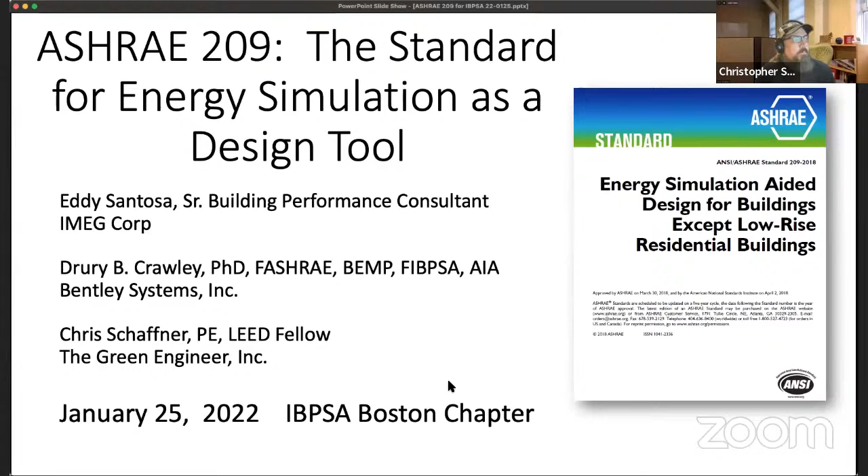So that's tremendous. What we're going to talk tonight is about ASHRAE 209. For those of you who are not familiar with it, we'll get an overview of that. And for those of you who are familiar with it, we're going to give you a chance to give us some input and some feedback. As was mentioned, all three of us are members of the ASHRAE 209 committee, and there's an active effort going on to potentially update that standard, and we're looking for input from users to help us understand how we can make a better adoption.

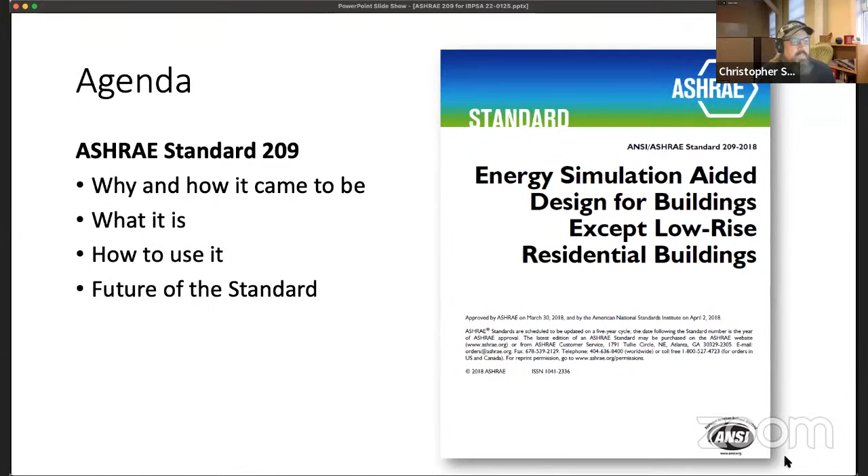So we're going to start with what is it, and specifically why it exists, and then what is it, and then I'll go through some of the details of the different cycles of modeling, and then we'll talk a bit about the future of the standard. So with that, I'm going to hand over to Eddy, and he's going to walk us through the first section here on the standard itself.

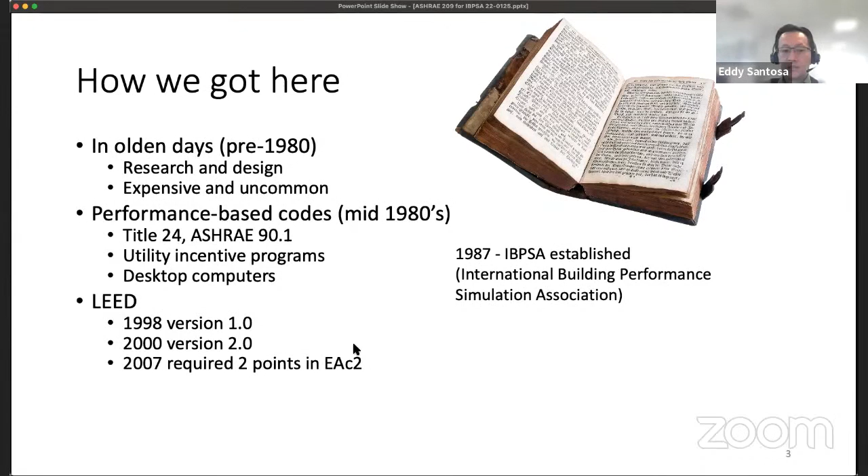In 1987, IBPSA was established to help enhance building performance in the market. I think energy modeling became very popular starting with the adoption of LEED, especially around 2007 to 2010 - it became very popular. I started my career around that era. I still remember in 2007, I was in a job interview, and I put in my resume that I have energy modeling skill, and architects still asked, is it like 3D Max? So apparently, although it became popular, it was not very commonly understood. But hopefully now everybody knows what energy modeling is.

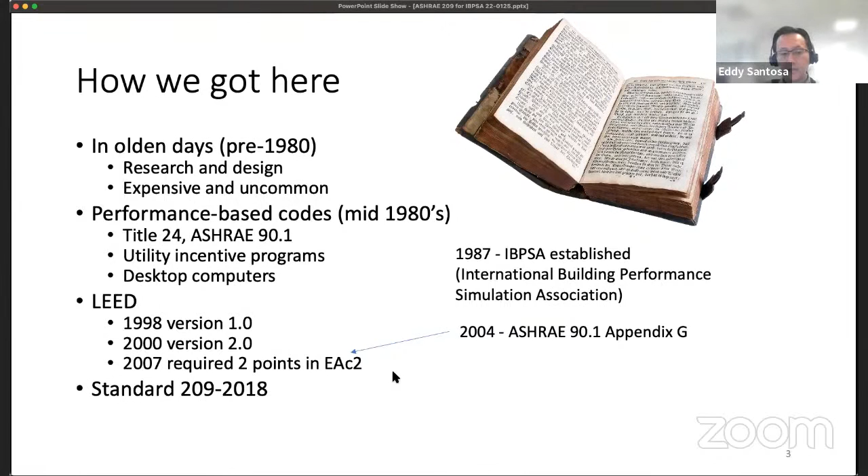90.1 is primarily used as a tool for verification on LEED, and everybody became familiar with the process. In 2018, ASHRAE started introducing 209, which primarily describes the methodology to use energy modeling during the design process, which is one step further from using energy modeling as a validation tool, and now becomes focused on the methodology in the design.

So why do we use energy modeling? If we do a lot of modeling early, we can influence the project very significantly, more than if you do the modeling at the end of the process. The level of effort is also slightly different. At the end, you have more complex stuff, but it's hard to change because everything is already decided, and any change affects all the drawings and everything. So it's a lot of effort to change a project at that level if you do energy modeling late in the stage.

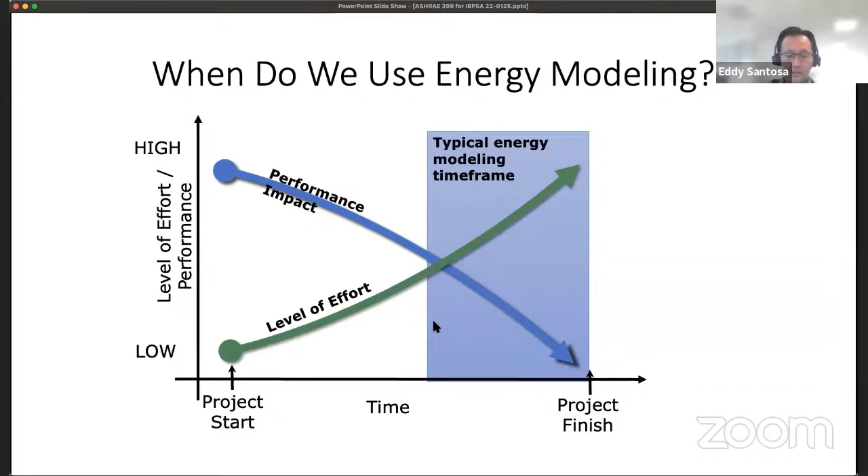However, primarily, I think energy modeling is still used at the end of the process. I've worked with a few companies and always ask people, how do you use energy modeling? They still use it primarily for load calculation and for the compliance process, although more and more people use it in the design process.

As I mentioned, there are two primary uses of energy modeling: as a design tool and as a validation tool. The validation tool we knew about - rebate certification, especially LEED, code compliance, whether you go to ASHRAE 90.1 Appendix G or energy cost budget or using ICC performance-based. And the design tool - we use energy modeling or building performance modeling to define a benchmarking or define a project energy goal, as well as test different options in the design.

So that's the one we discuss in 209 primarily.

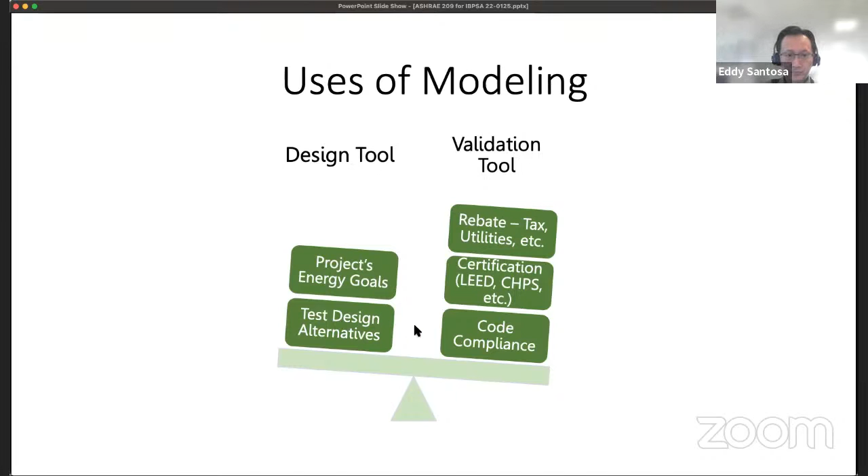The next use of 209 was also influenced by the popularity of the integrative process design. If you talk with architects about the design process, the integrative process has become more and more popular, I think, because you can define the project goal and the process early, and after that you can have a smoother process than comparing working in a separate way and then trying to combine and refine it at the end. So it's become a popular process, like a lean project management - integrated process is becoming very common for defining the building.

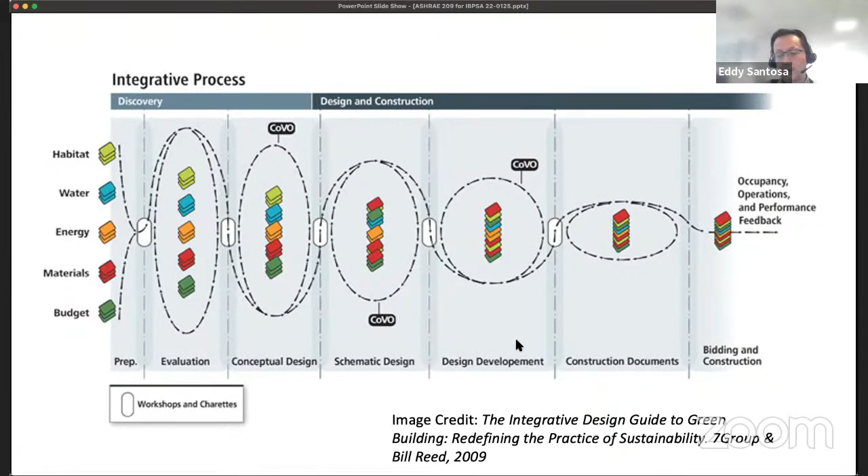That's where we can talk about different types of building components like habitat, water, energy, material, and budget very early. I think it's very critical to use the integrative process design in construction projects currently.

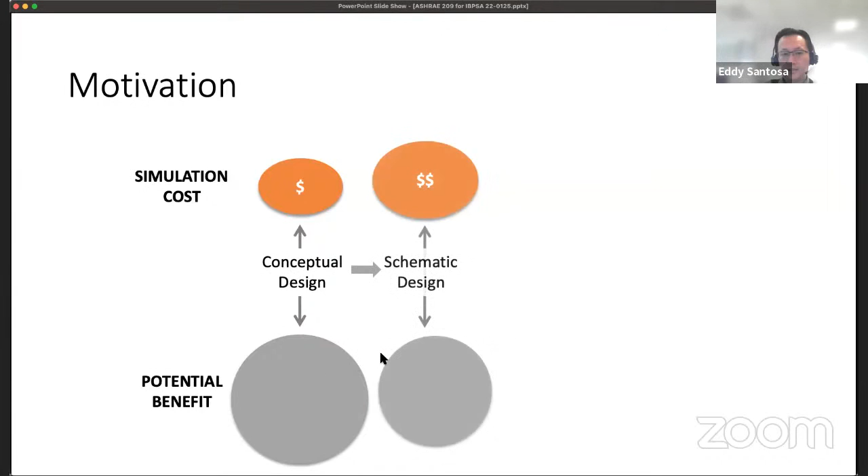In terms of the motivation for why we use early energy modeling, especially in conceptual design, as we mentioned, the potential benefit is higher than if you do it in schematic design or in the subsequent process. The simulation costs also differ - although if you do a lot of early design, your early design costs will be higher, but the potential benefit aligns with the process of design. So it's higher at first, then getting lower.

I talked with an architect about what is actually the benefit of using early design. For him, it's really helpful when we do early design energy modeling and define all the envelope requirements - they have a smoother process during DD and CD. So there's less revision, better implementation in rapid delivery. He predicted he could save about 5 to 10% of time, which is very significant when talking about the overall design process.

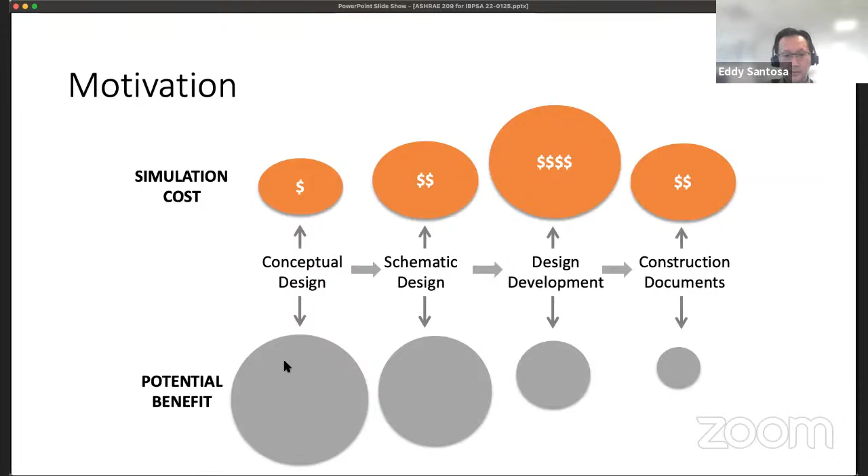So why do we need 209? I think we know that 90.1 is very popular as a validation process and for code compliance checking, but 209 is very critical. There are a few things we see - first is to optimize the building, which is the validation process. That's also very good for organizations to define when they certify high performance buildings.

So it defines the methodology and requirements, or when you give an incentive to the project team to do the early design process. There are a few incentive programs that specifically target early design process - for example, Austin Energy, I believe they still give an incentive program if you do early design. So it can help a utility company define the requirement.

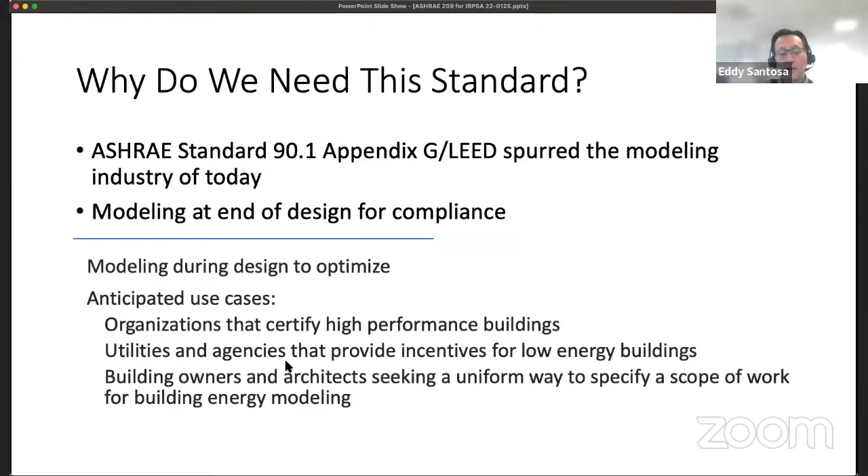Client and architect - that's very critical. I believe 209 should be primarily used in your RFP, because using 209 in your RFP, you can have a similar proposal between two companies. If I ask for an early design from your company, two companies will give me different things. So by defining the RFP based on 209, the architect or client can make an apples-to-apples comparison.

Another important use of the 209 is with the AIA 2030 challenge. If you're not familiar, it's a challenge put forth by AIA to push carbon neutrality by 2030. Based on their reports, they compare modeled and non-modeled buildings, and there's a significant saving if you do energy modeling rather than just compliance at the end of the process. I believe the number is a 10% to 20% reduction, and that's pretty consistent across the years. I was involved a lot in the 2030 challenge as well, and that number is consistent with my own data.

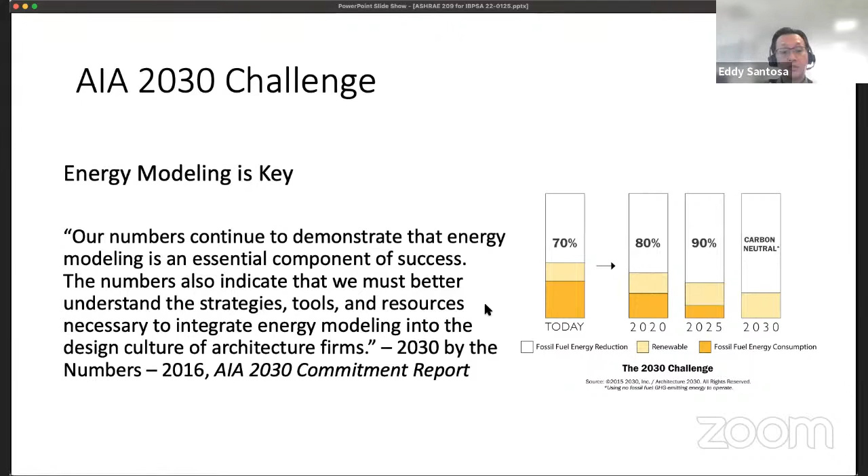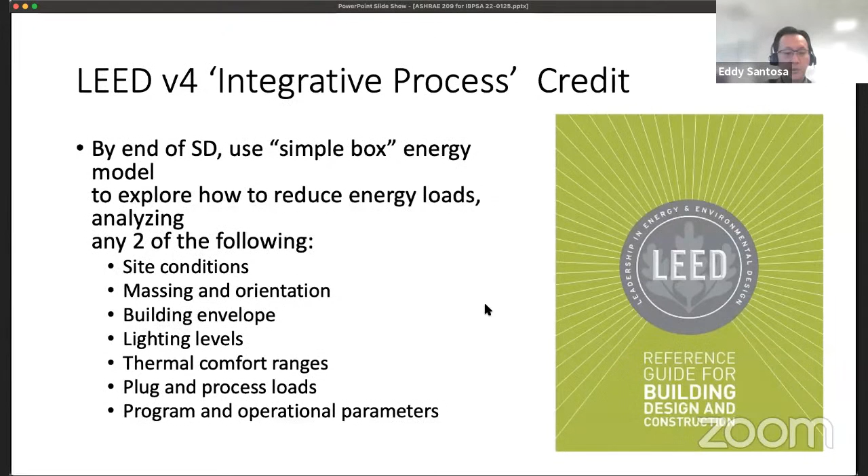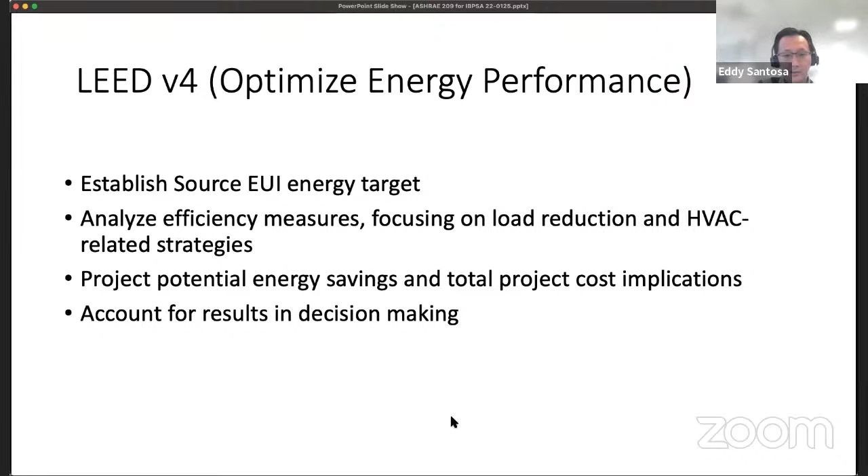Another potential use of 209 is the LEED integrative process credit, although it's being updated in version 4.1. In LEED version 4, you need to do 2 analyses in each mentioned category. In version 4.1, they're more flexible, using 'as applicable' rather than requiring one-by-one analysis. The 209 gives you a framework for achieving the LEED integrative process design, where the goal is establishing project benchmarking, the source EUI, or load reduction, which Dru will explain. I believe it's all under cycle 3, covering potential energy savings and influencing decision making in subsequent design. That's very critical. In earlier adoption, I met a few LEED consultants who would just fill up the form without doing actual energy modeling to get the integrative process credit, which I think is not good practice. Next I'll hand it over to Dru to explain the detailed structure of 209.

Dru, go ahead. Great, thanks Eddy.

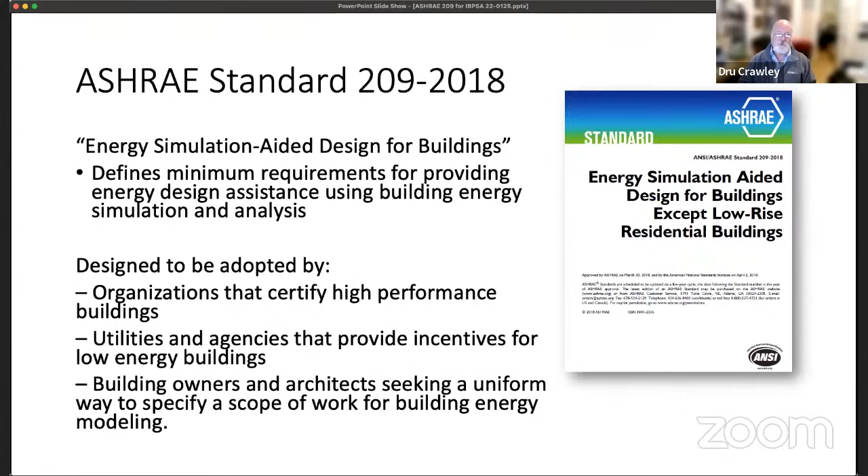I'm going to talk about structure, and it will repeat some things because Chris is going to follow up with modeling cycles, which is one piece of this. Eddy's given you a great overview of why we need this standard, particularly for uniformity so owners and architects understand what they're trying to get from simulation. Standard 209 is really starting out to be the minimum requirements for how you do energy simulation, particularly around design. It's supposed to be adopted by organizations certifying buildings, but also utilities and agencies, so they have a common way of specifying that.

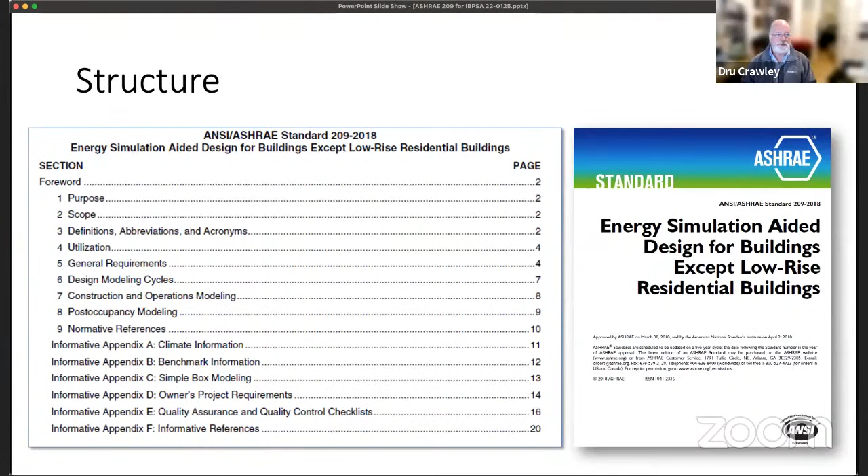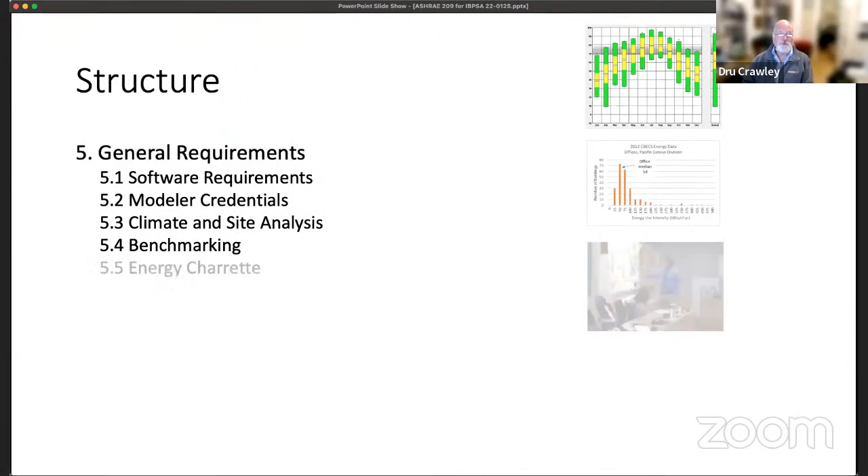The structure looks a lot like many ASHRAE standards. It has a foreword, a purpose, scope, definitions, how it's to be used, and then the meat of it is really sections 5 through 9, which includes some normative appendices. Section 5 has a series of general requirements - you must do all of these items - and then there are some general modeling cycle requirements. We'll go into each of these a bit more.

There are minimum requirements for the software you use - what are its capabilities, how are you supposed to do it, who is qualified to do this in particular ways. There's analysis of the site and climate to provide background information to understand the issues and challenges for that site. There's how we're going to benchmark the building, how it's going to be seen or processed, how we're going to make sure we're getting there, how you set up and do an energy charrette, and finally establishing goals for the particular project. They may be related to getting LEED points or the 2030 challenge or whatever you're doing, but it's one of those things where you sit down as a team.

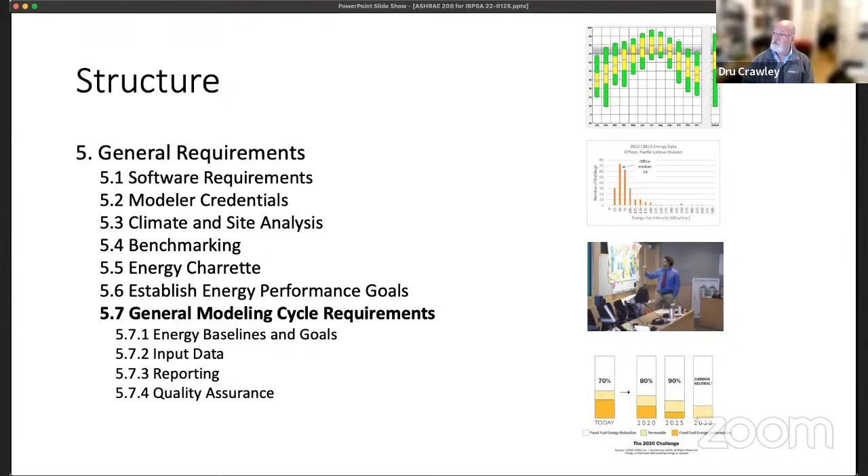Within the general modeling cycle requirements, there are requirements about setting baselines and goals, what data you need to work with, how you report that out, and how you make sure you've got decent quality results. As far as the structure of the main core design modeling cycles - and Chris will go over each of these in more detail - you have simple box conceptual, load reduction with a lot of focus on that, HVAC system selection, design refinement, design integration optimization, and energy simulation aided value engineering.

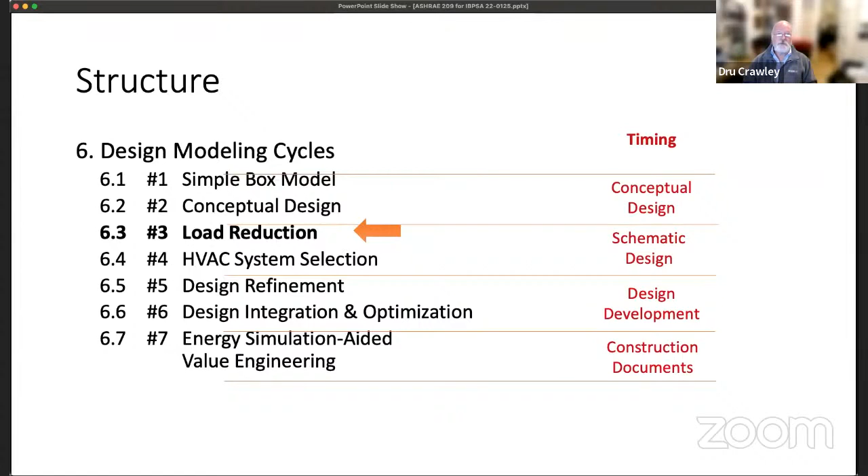So timing wise, we're looking at the first two for conceptual, schematic, then we think about loads and HVAC and design development, refinement and optimization, and finally where we are preparing final documents. So here's an example of the simple box modeling text.

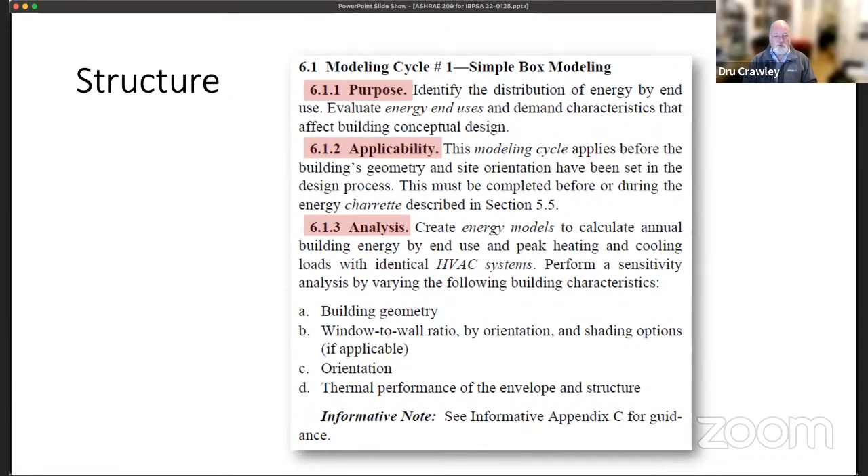So we have a purpose, where it's applicable, and then how you go about doing it. There often is additional information in some of the appendices, whether they're normative or informative.

So if we look again at the structure, general requirements, we talked about most of these already. Section 6, the design modeling cycles, and then there are also construction and operations modeling cycles as designed, change orders, as built, and comparing design to actual.

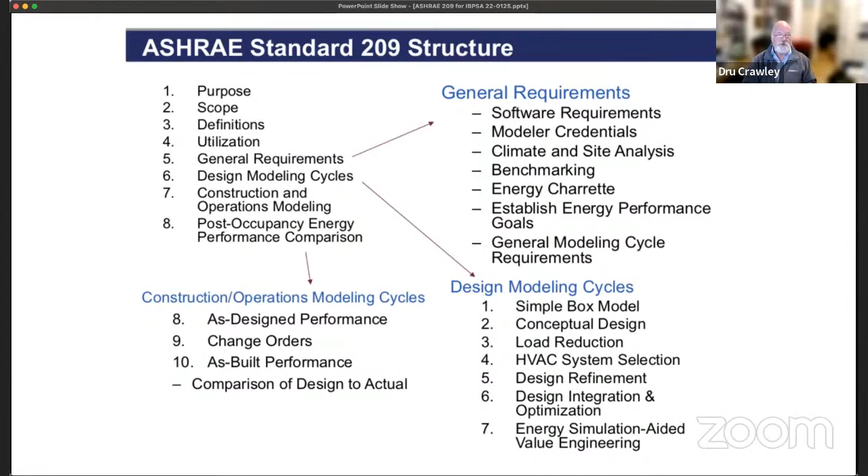So how do you comply? Well, first, it's not mandatory for all buildings. There are some standards. 189.1 has recently brought 209 in, particularly some of the elements of that. But you have to establish an energy performance goal first.

You have to do an energy charrette. You have to do a climate analysis. It needs to be somebody who's certified in the area, either BEMP or BESA, to either perform or supervise the modeling. You have to do an energy model before the end of schematic, focused on reducing peak loads.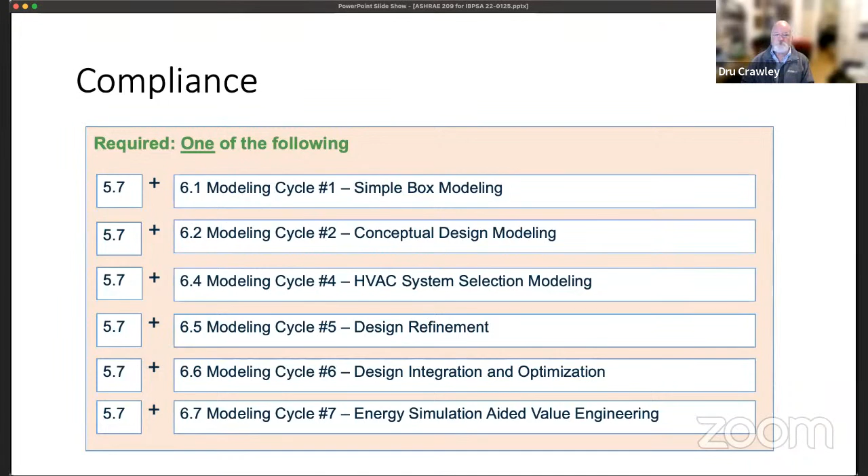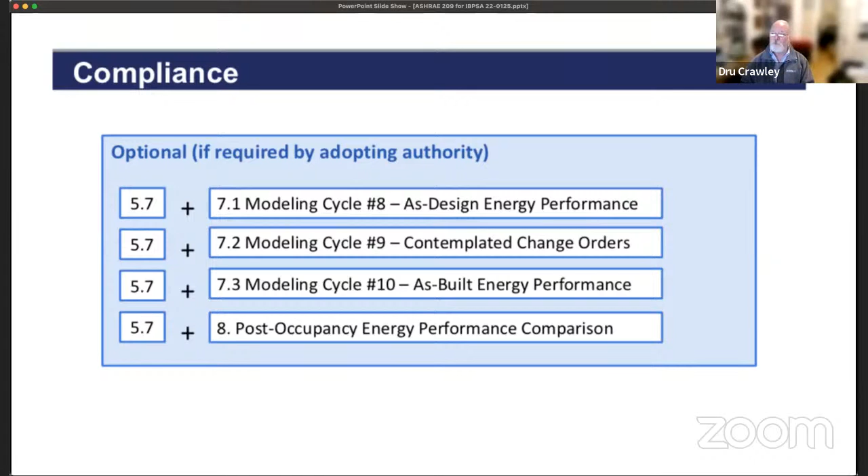So here shows you what you can do, either all the requirements in 5.7 and any one of these other 6 options, because 3 is already required. This is optional, and this is if the adopting authority decides they want to add additional things after the project is complete, or as designed, change order, as built, and energy performance comparison also there, but they are not part of the basic sets of it.

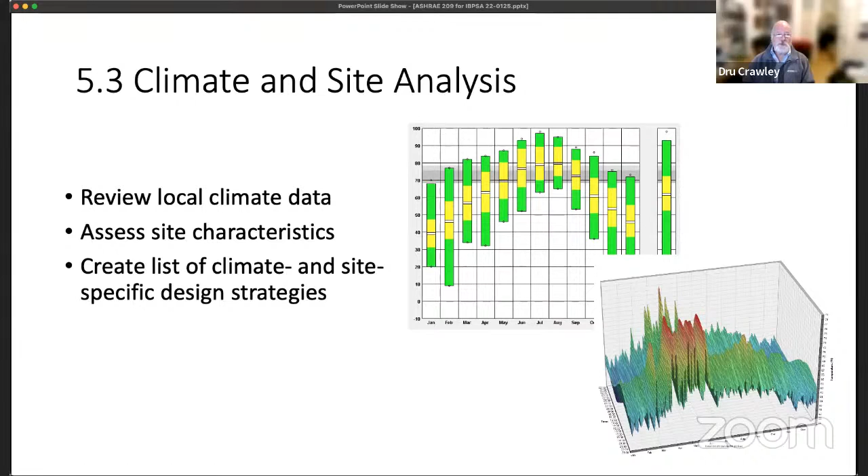So if we look at some of the general requirements, looking at climate and site analysis, making sure that the design team knows where the challenges are, and to begin to start listing climate and site specific design strategies. What will work here? What are the opportunities for dealing with the climate in early design?

Similarly, sections 5.4 to 5.6 deal with benchmarking, charrette, and performance, starting off with benchmarking databases such as CBECS or Energy Star Target Finder, AIA 2030, or DOE Building Performance Database as well.

Charrette, it describes what needs to be done. There are good examples of lots of different opportunities out there, but trying to help the team understand, and it's not just the energy modeling doing that, this is the entire design team working on this.

But why are we doing energy modeling? What metrics are we going to set as a team? Results of anything that have been done before. Maybe there have been some climate analysis. How are we going to decide what a good solution is financially? And then where are we going next, and who's going to do what? And those are all very important topics for that.

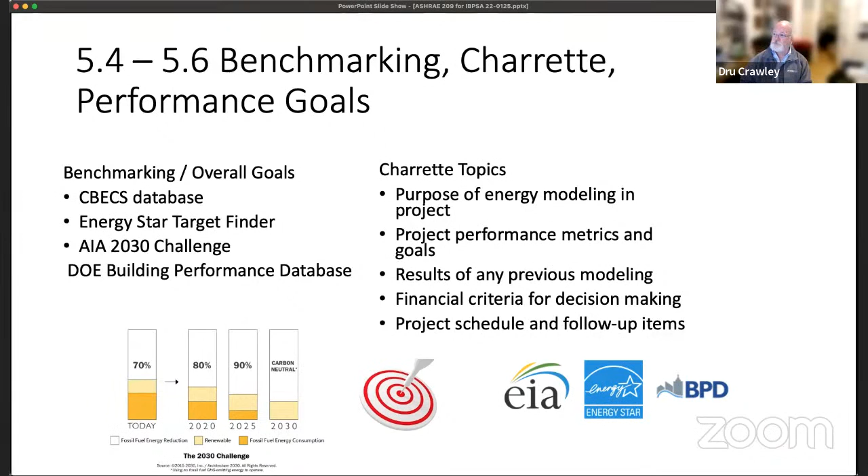So setting the goals, this is the overall building energy goal. It could be at a specific discipline or system specific, looking at envelope, daylighting, plugs process, hot water, HVAC. And those may be, we're trying to go beyond another standard. This is actually a piece of one of the advanced energy design guides showing a possibility of where that could go if you're trying to get beyond code, for example, and that may be one approach for doing that.

You could set, we want to exceed the requirements in the envelope section or the lighting section as a way to move forward.

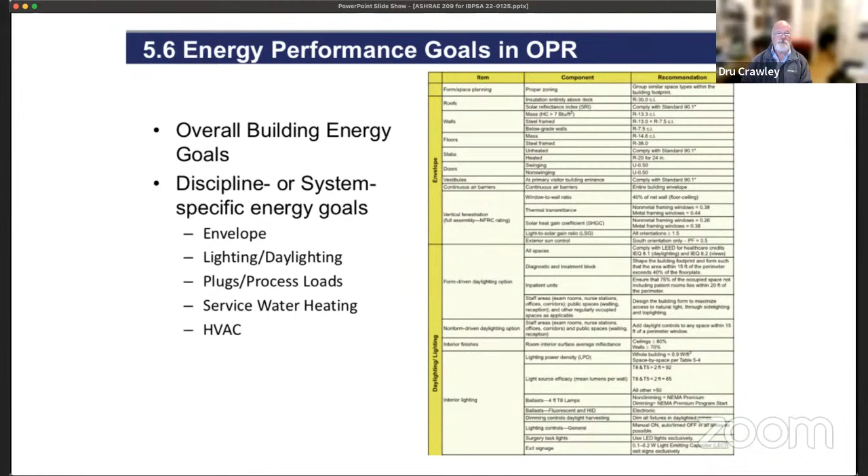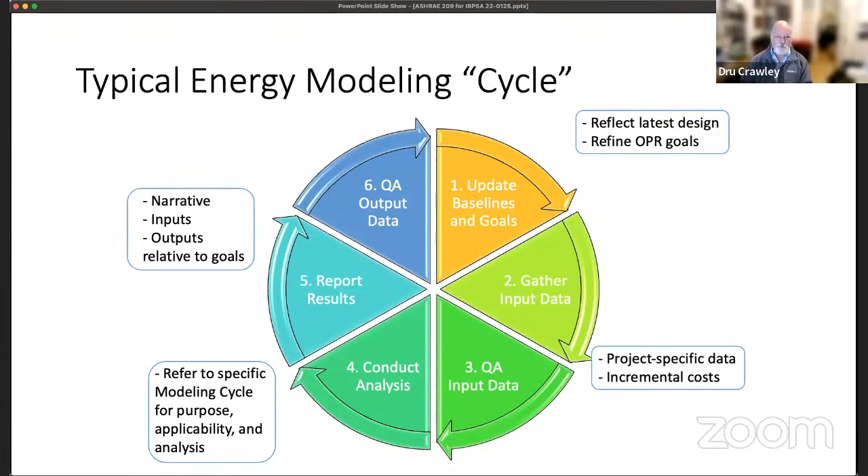Typical modeling cycle, starting kind of top center, updating the baseline goals to make sure that we still make sense. And this is for each of the cycles. Gathering input data, project specific incremental costs, making sure that we've got the data we need, and then conducting the analysis and the results and making sure it's clear to the team what it is and how it reflects that. So you do most of these things each cycle.

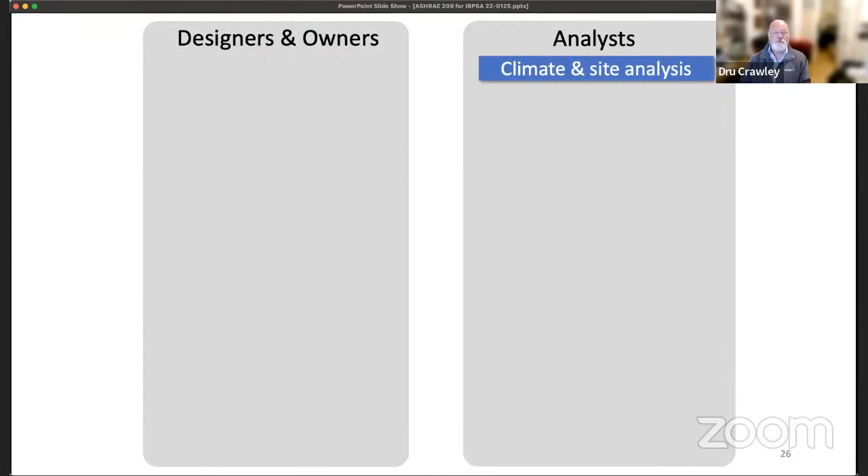And who does what? Starting down the list of where we're going, we've got designers and owners on the left and analysts on the right. The analysts are going to be doing the climate and site analysis and the benchmarking, gathering that data about our site, the climate, and what are reasonable goals or where we're starting.

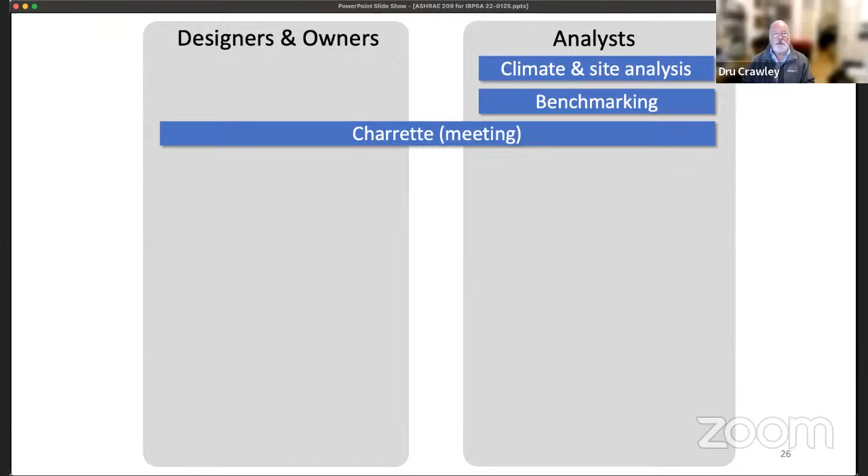And then charrette is where everybody's meeting. Designers and owners are really responsible for setting those goals and being able, but also to make sure that everybody understands what's needed in terms of inputs and baselines and what we're trying to achieve here.

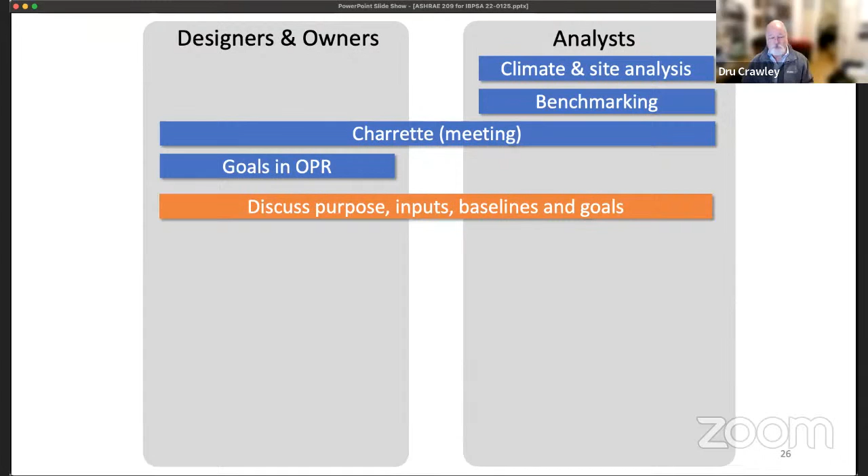The analysts then will do their analysis, with each of the modeling cycles report what they use as data for running the model and also the results. And so back and forth with that to make sure that the analysts and the design owner team really understand what it is and how that's worked. So if they have questions, they can be resolved quickly.

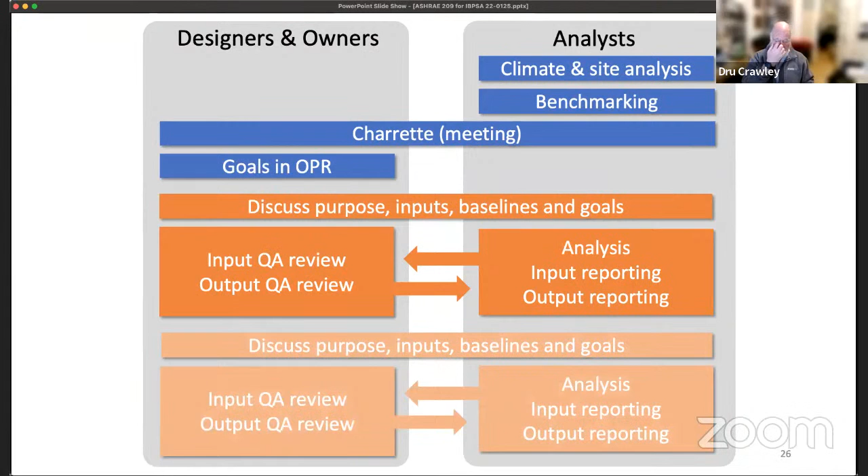So that iterates as we go through the cycle, being able to change at each section or each design phase. So at this point, I'll hand it on to Chris and let him talk about the modeling cycles.

Yeah, thanks, Dru, and thanks, Eddy. So, again, I think the thing about 209 that's interesting to me is that part of what we're trying to do is create a common understanding of the scope of work that we do for building simulation on a project.

And certainly as a modeler, and I know other people on the Zoom tonight have had this experience, a client is asking us for some modeling effort, and we'll propose one thing, and another firm will propose something very different, with different scope, different prices and such. And so by tying things down to 209, it gives us an opportunity to have an apples to apples comparison.

If one firm is only doing modeling based on the final as-designed building, and another firm is offering to do conceptual modeling and load reduction modeling, there's a very different set of services and a very different set of outcomes that come out of that. So I think that's the real power that 209 potentially has.

So what I'm going to do is walk through very briefly each of these cycles and explain what's involved in this. We do have question and answer happening in the chat. If you've got any questions for us, go ahead and type that in there. And then we're going to be looking for your feedback shortly on this as well.

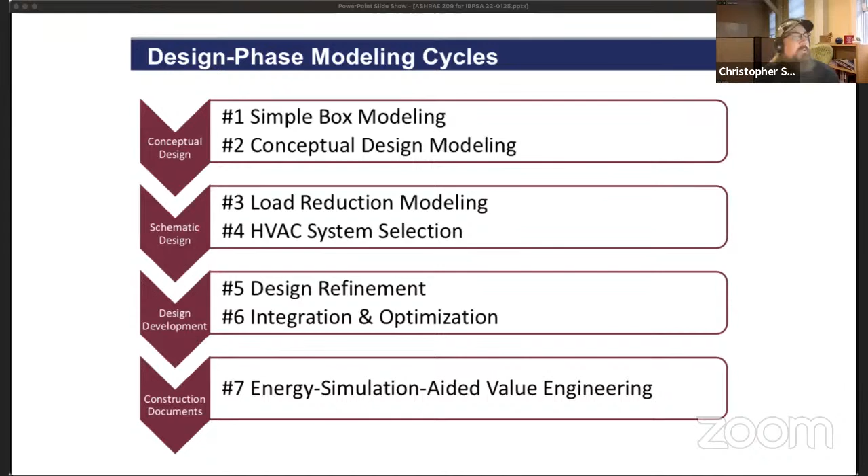So let's dive into the design phase modeling cycles first. Let's see if I can make this thing move again.

So first one is simple box modeling. Here we're creating a prototype model or a simple model based on the overall size of the building, its location, its program. And then we can do things like varying the building geometry, the window wall ratio, and the orientation of the building to understand how that might impact the design. Thermal performance of the envelope is another piece.

So you might be doing this at concept design, even before you've picked the site, and certainly before you've created the building form, to see what opportunities there are to affect the energy performance.

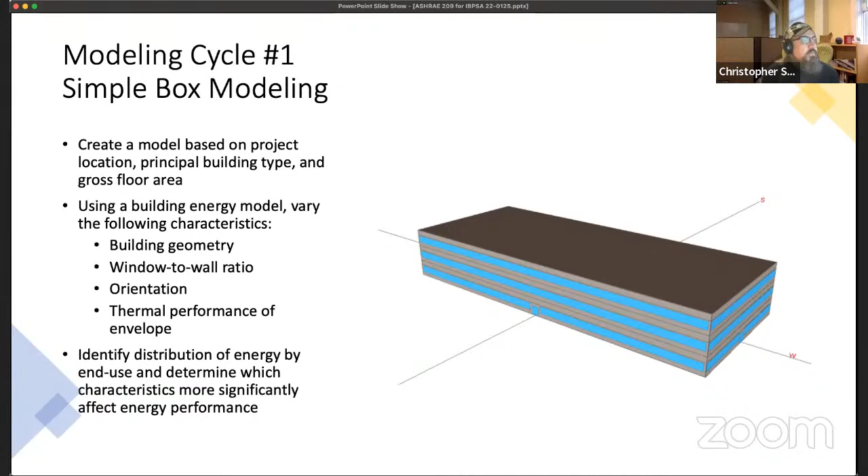Cycle 2 is going a little deeper on that, and you're holding internal loads and HVAC systems constant, but then looking specifically at different building options as far as the form and architecture.

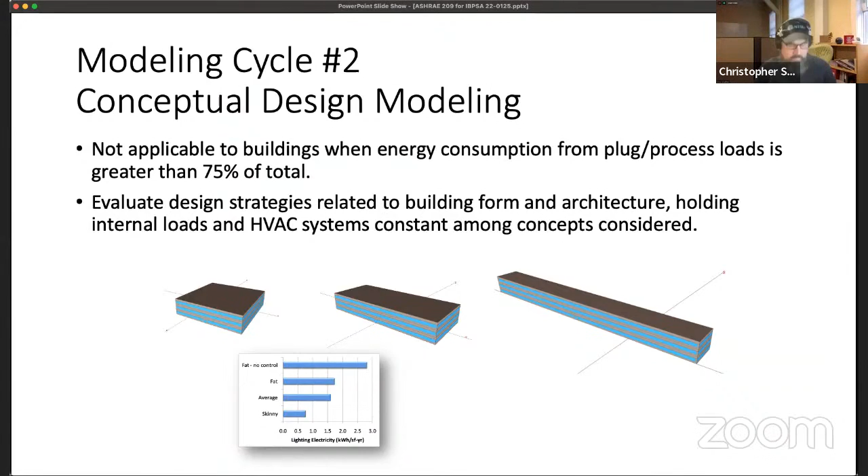Modeling cycle 3, the load reduction modeling. This is the key one. This is the one that's required in the basic compliance path. And the idea is that we're doing this during schematic design or earlier, and we are trying to identify how to reduce the loads.

If we think about designing an efficient building, too often we jump to the idea of let's do efficient equipment, right? So we'll put an efficient chiller in, and that'll save us energy. But if we can first figure out how to make that chiller smaller, if we can reduce the loads, then we can do that in a more cost-effective way. And so this load reduction cycle is a critical step here.

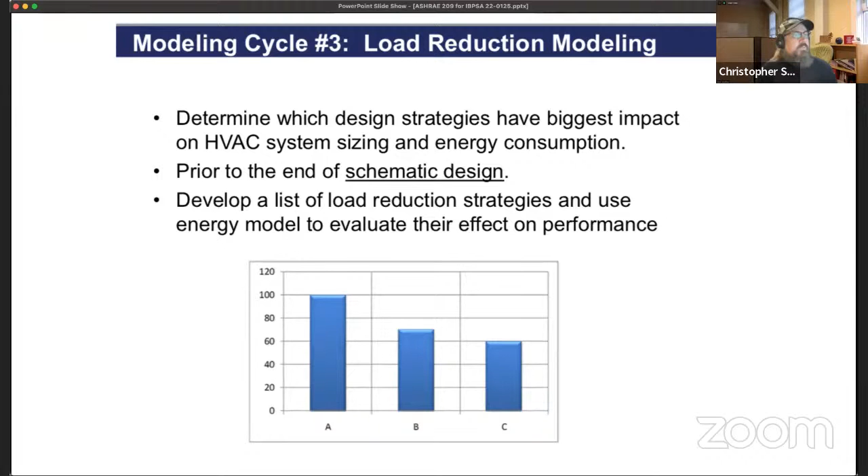And so we're trying to identify what are the strategies that have the largest impact, and looking at a number of different strategies as part of that.

Modeling cycle 4 is about HVAC system selection. So after you've done the load reduction, then we can compare different alternative HVAC systems. So we're keeping other things constant and just varying the HVAC system type.

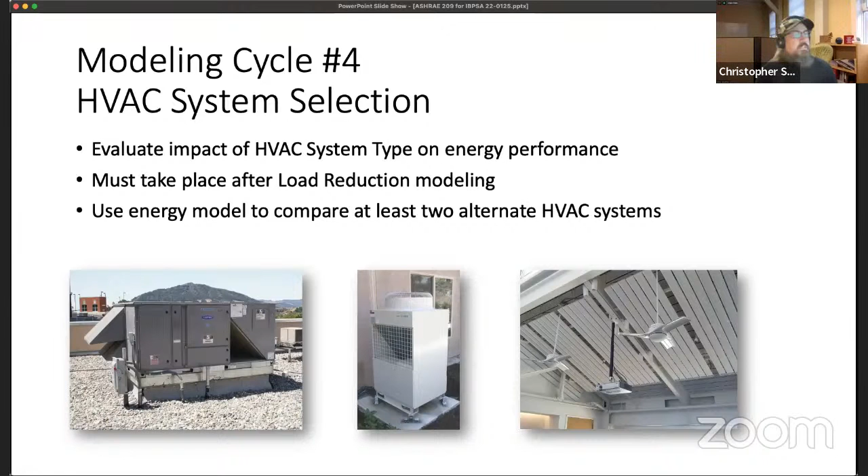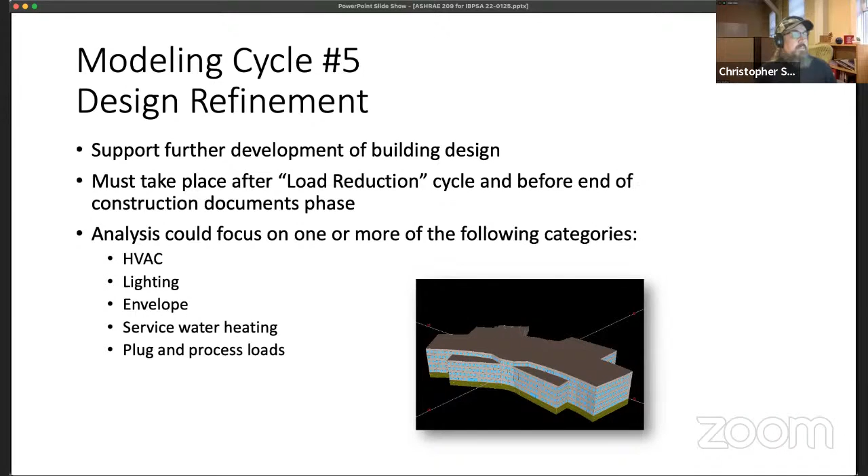If we're first looking at building form and orientation, minimizing loads, picking the HVAC system, now we're refining further. Maybe we've got a system type, but we're looking at individual pieces of equipment and their performance, control strategies, lighting design, things like that. You could also look at service water heating, plug and process loads, or anything else.

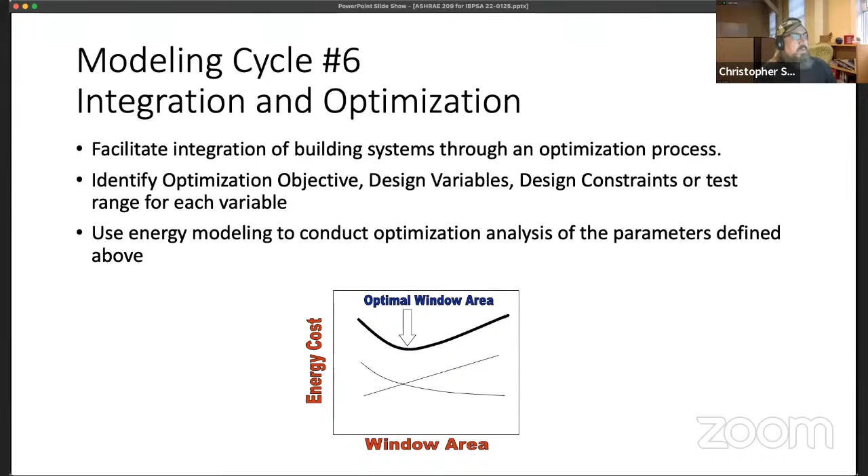Then value engineering. This is an important step that a lot of projects fail to do. We design around something, and then the pricing comes in and it's too expensive, and we say, what do we cut? Let's cut some of this efficiency we've got here. We don't go back and see what happens to building performance, or see if that's actually short-sighted, maybe there's a life cycle benefit.

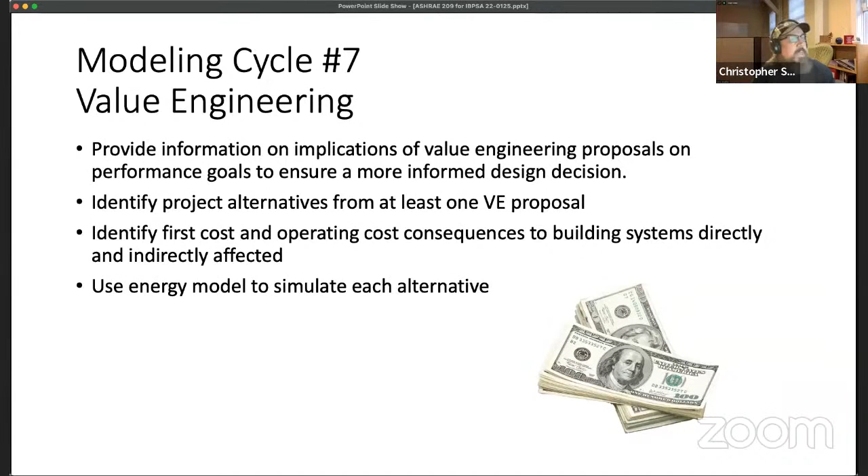So with the value engineering step, the modeling cycle, we're going to be modeling the VE options to see what kind of impact they're going to have on building energy performance, and then tying that to life cycle costs.

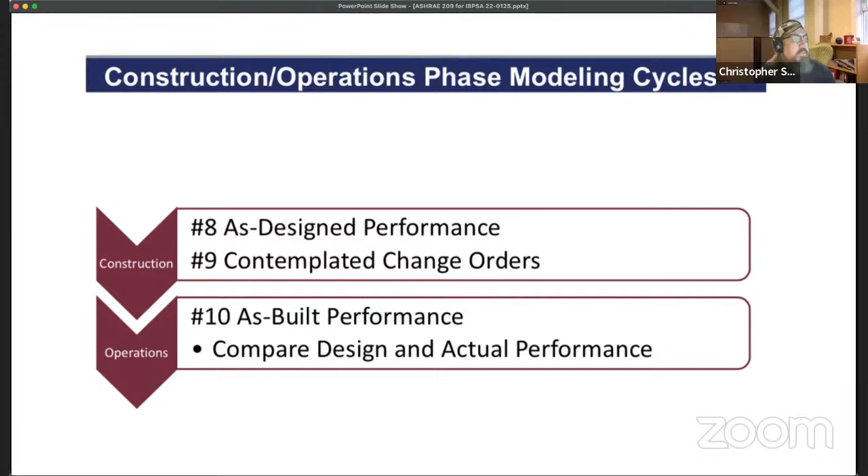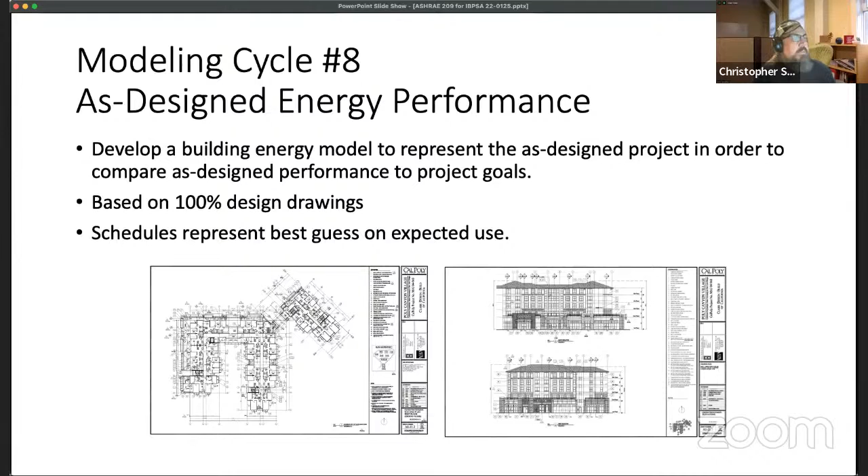So the as-designed energy performance, this is the final design. This is typically the only step that some projects do. This is what you're going to use for code compliance or submitting to LEED or some other green building standard. So you'll be using the as-designed project here, with the 100% design drawings, 100% CDs.

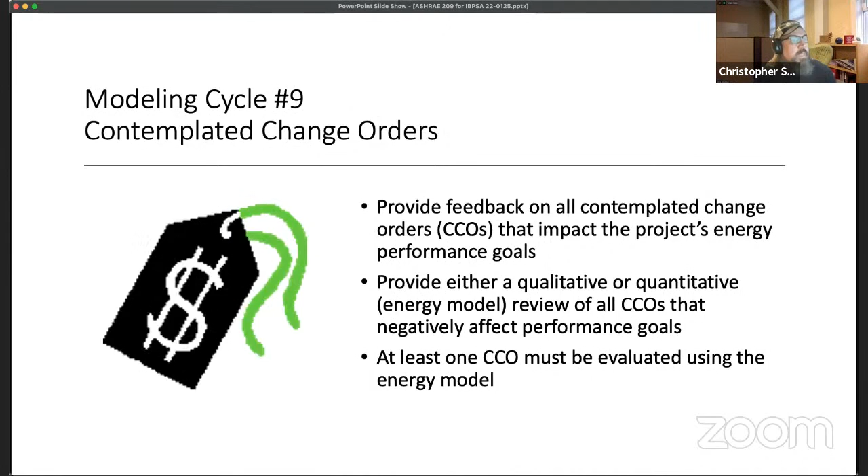And then contemplated change orders. So you have a VE process before you've completed design, but it's also possible that during the construction process you may come back with proposed substitutions coming from the building team, the construction team. And so again, we should be looking at that with the model.

And then modeling cycle 10 is as-built energy performance. So here we take that as-designed model, but we'd adjust it based on any changes that happened during construction. If there was a substitution or we know something was done differently, we'd capture that here.

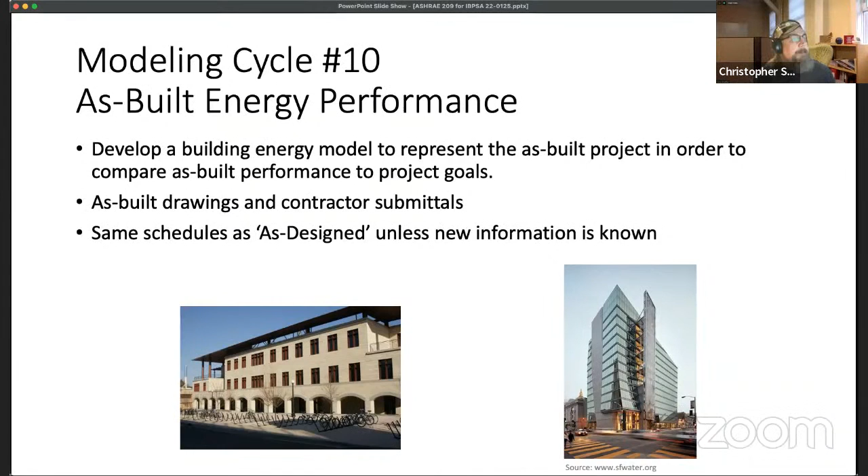And then finally, there's the post-occupancy energy comparison. This is the M&V process. This is the idea of the calibrated model. The idea here is that the model can live on and provide some value to the owner beyond just the design process, because we can now use this model, once it's calibrated, to look at future energy improvements to the building. It's also used for understanding how much did we really save, and there's some specific requirements around that.

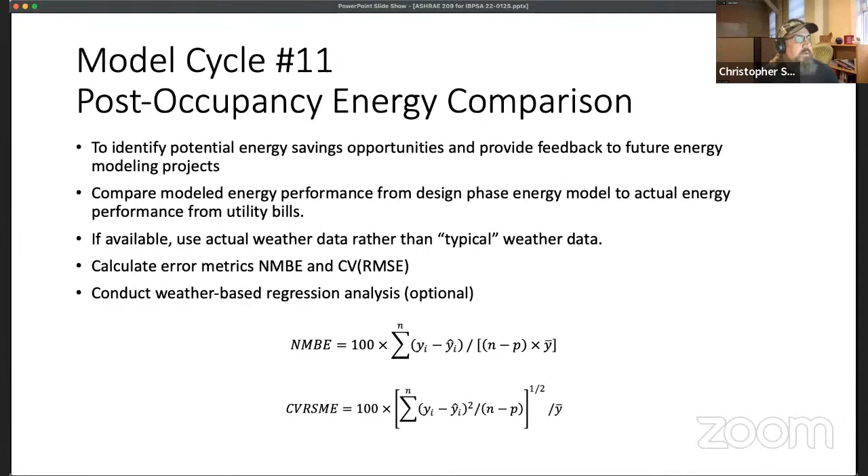Yeah, this was from a presentation I did for ASHRAE Brazil and IBPSA Brazil probably about 1.5 years ago, where I talked about just the pieces we just talked about. And then Professor Hernandez Neto from University of Sao Paulo prepared this document, really showing the same thing we've been showing, but trying to get it all on one page with some more text. And he went on to talk about how 209 is already being used within Brazil.

Yeah, so I think one of the lessons learned from this is 209 came out in 2018, and like any standard, we certainly expected that the whole world was waiting for this and would jump on it and start using it. What we found is that the uptake of 209 wasn't perhaps quite as quick as we thought. I know one disappointment was that LEED, instead of adopting 209 as the requirement for the integrative process credit or for the energy optimization credit, simply references 209 in their LEED reference guide.

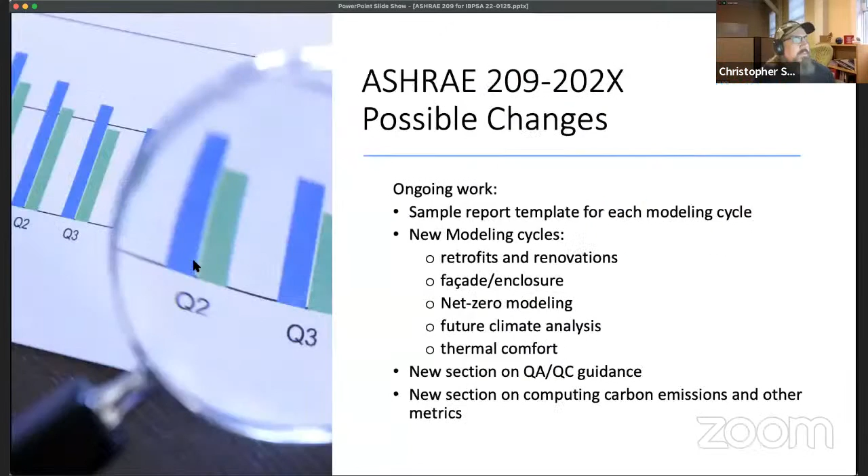David suggests using 209 in performance contracting simulations on existing buildings. That's an interesting approach—it would take that last cycle of 209, the post-occupancy energy comparison cycle. That's certainly an option if someone's doing that as part of their performance contracting. It could also be a good starting point for the renovation piece, helping someone understand how to create the baseline, calibrate the model, and handle the various pieces needed to start that.

I think some of the things we're doing will have support for that. David also says that for commissioning, he often requests to review any energy model and asks the modelers if they follow 209. I'll follow up and ask, do any of them say yes, of course we do? And if so, how many?

He also suggests that referencing ASHRAE 209 in Standard 202 or Guideline 0, both standards around commissioning, could help adoption, and also referencing 209 in 90.1. I think we're working on that—getting it in as a little preamble to Appendix G. That's underway, hopefully, for the 2022 version of 90.1.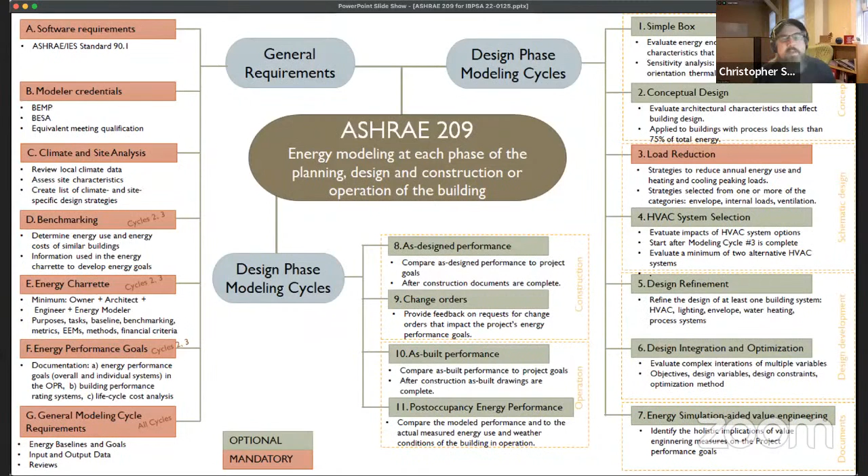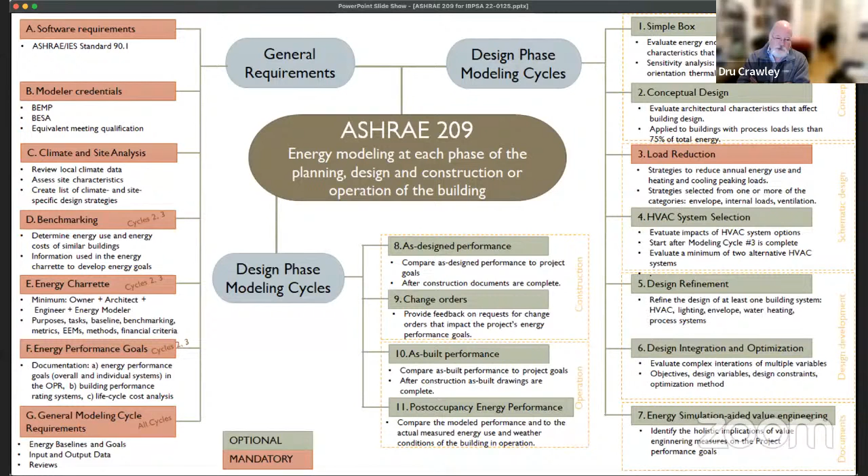Dru, do you have any last words before we wrap up? I don't, except to watch for announcements of public review drafts and other things. I know that Standard 209 is considering having IBPSA be a co-sponsor of this particular standard, so look for more information about that coming soon.

Yeah, that's an important point. IBPSA is very involved in the development of this standard.

Eddy, any last thoughts? Yeah, I think it's a last thought - if you have any feedback, or something you don't want to mention now or don't have time for, feel free to email us. I think that's important feedback, whether you use it or don't use it, and why. I think that's critical, so we can understand and try to implement it, and hopefully in the future, once a new standard comes, more and more people adopt it and use it.